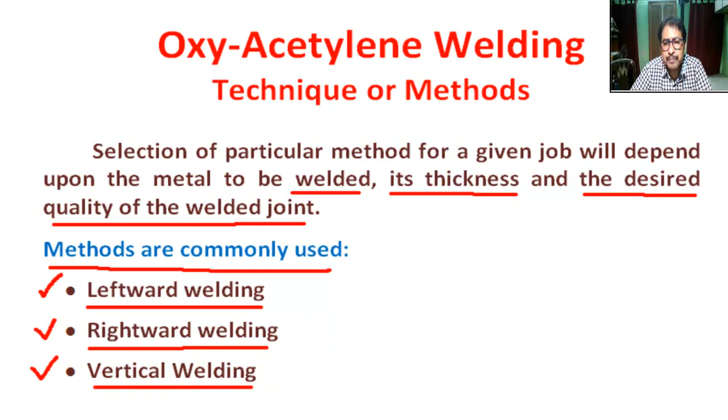Methods commonly used: there are three main methods of gas welding. Number one, leftward welding. Number two, rightward welding. Number three, vertical welding. Okay, what is leftward welding?

This is the picture of leftward welding. This is plate 1, this is plate 2. These two plates to be welded have V grooves, nearly 80-degree angle. This is the edge preparation. This is the welding torch, 60 to 70-degree angle. This is the filler rod, 30 to 40-degree angle. This is the direction of welding, right hand side to left hand side.

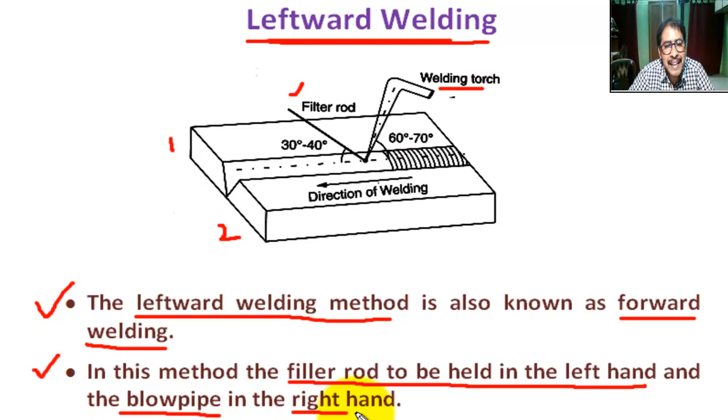Okay, the leftward welding method is also known as forward welding. In this method the filler rod is held in the left hand and the blowpipe in the right hand. The welding operation is carried out from the right hand side towards the left hand side. An 80-degree V groove is prepared at the end of the plates to be joined. This method is widely used for butt welding of plates up to 6 millimeter thickness.

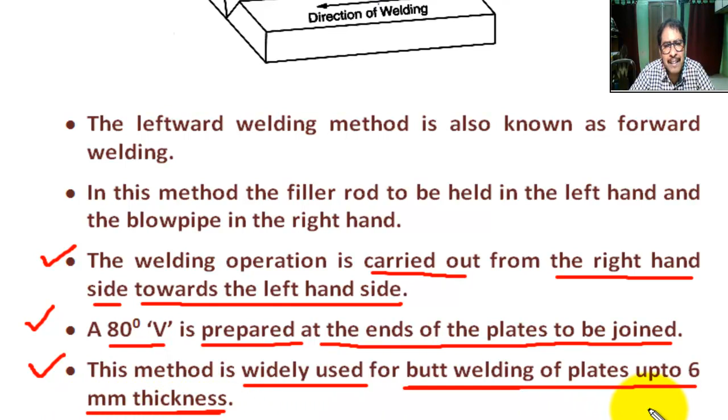Now what is rightward welding? This is the picture of rightward welding. This is plate 1, this is plate 2, the two plates or job to be welded. V grooves, nearly 60-degree angle. This is the edge preparation. This is the welding torch, 40 to 50-degree angle. This is the filler rod, 30 to 40-degree angle. This is the direction of welding, left hand side to right hand side.

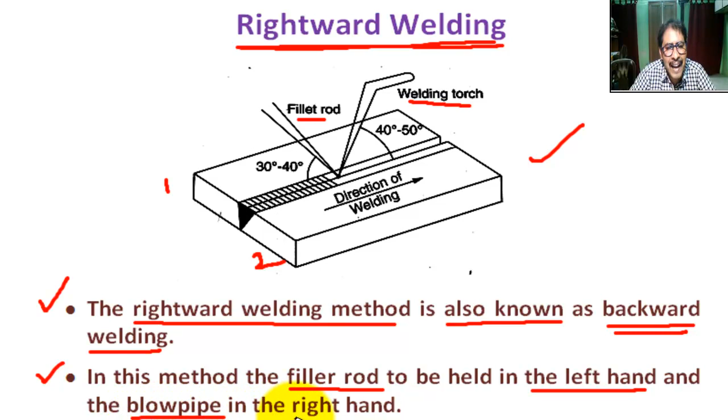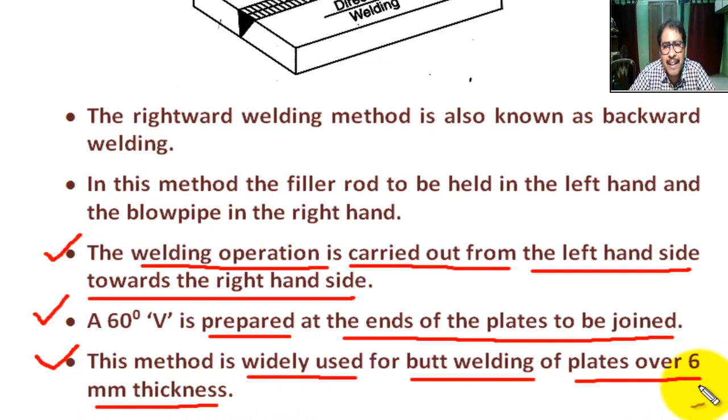Now the rightward welding method is also known as backward welding. In this method, the filler rod is held in the left hand and the blowpipe welding torch is in the right hand. Here the welding operation is carried out from the left hand side towards the right hand side, left to right. A 60-degree V groove is prepared at the end of the plate workpiece to be joined. This method is widely used for butt welding of plates over 6 millimeter thickness.

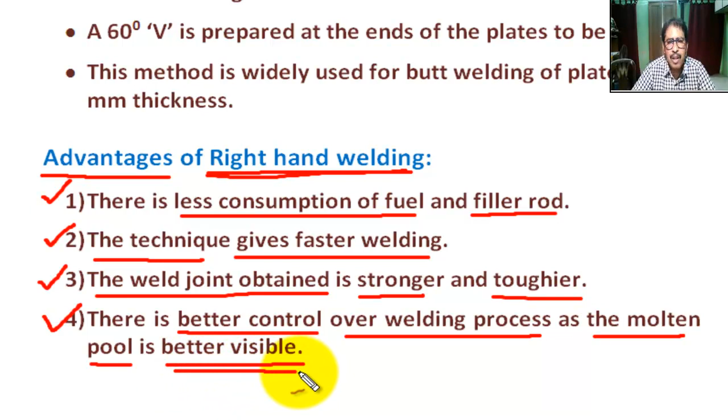What are the advantages of rightward welding? Number 1, there is less consumption of fuel and filler rod. Number 2, the technique gives a faster welding process. Number 3, the weld joint obtained is stronger and tougher. Number 4, there is better control over the welding process as the molten pool, the molten zone, is better visible.

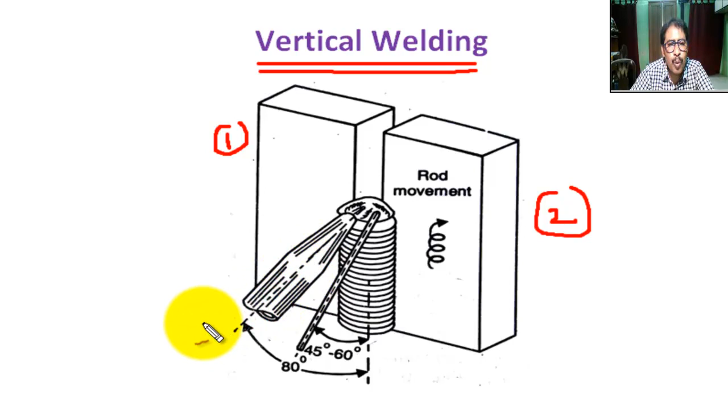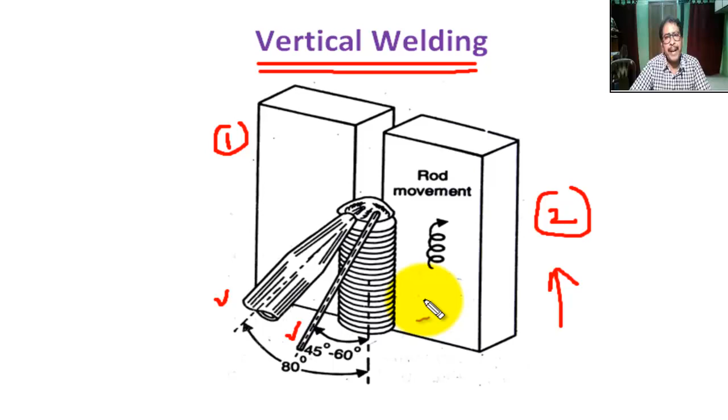Now, what is vertical welding? This is the picture of vertical welding. This is plate 1, this is plate 2. Both plates are in vertical position. No edge preparation is required. This is the welding torch, nearly 80-degree angle. This is the filler rod, angle 45 to 60 degrees. Here both the blowpipe welding torch and the filler rod move in a zigzag way, side to side, as the welding proceeds from bottom to top.

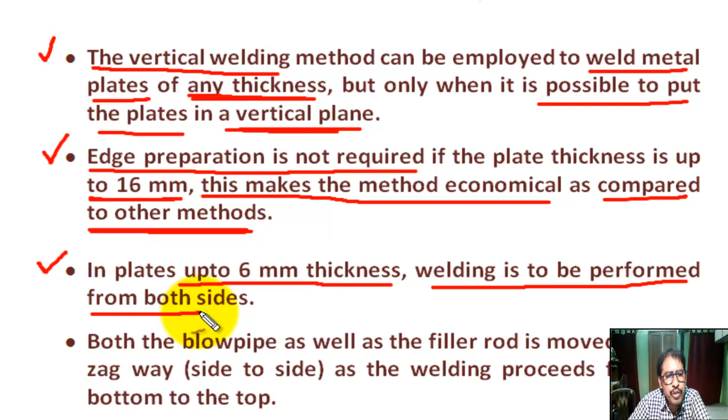The vertical welding method can be employed to weld metal plates of any thickness. This is the advantage, but only when it is possible to put the plates in a vertical position. Edge preparation is not required if the plate thickness is up to 16 millimeter. This makes the method economical as compared to other methods. In plates up to 6 millimeter thickness, welding is to be performed from both sides.

Here both the blowpipe as well as the filler rod are moved in a zigzag way, side to side, as the welding proceeds from the bottom to top. Okay, is it clear, my students?